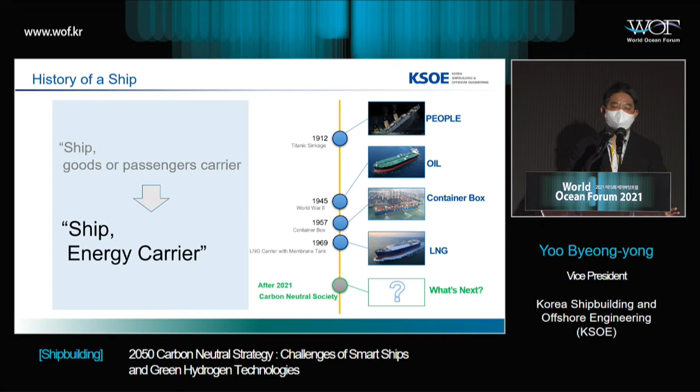That is because now ship is carrying containers, but from now on we will see a new era of ship as an energy carrier. But in the days of net zero, there is no way for ships to carry oils or coals. And what are we gonna do?

We talk quite extensively about carbon neutrality and hydrogen, but we have to see the two different scenarios here. The first is hydrogen as a cargo to be carried by a vessel, and another scenario is hydrogen as a fuel to run a vessel. So most of the presenters will elaborate on hydrogen as a fuel. That's category B in this case.

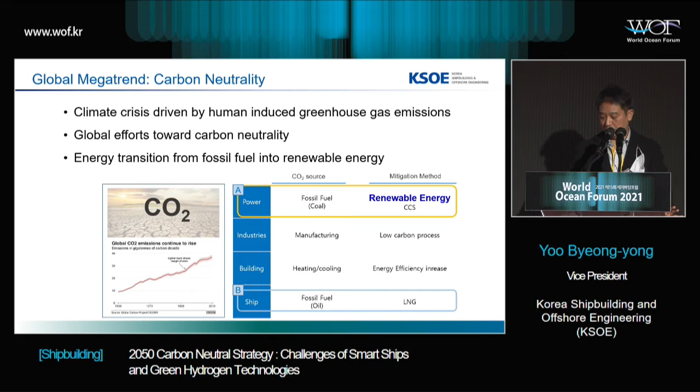So the environmental regulations and the operation of a ship itself drive the growth of hydrogen as a fuel, but the energy source, the energy mix, is a bigger driver for the development of hydrogen. Ships carry a large amount of cargoes, but now we are transitioning into renewable energy, so that brings about a serious concern. Now, why is hydrogen important?

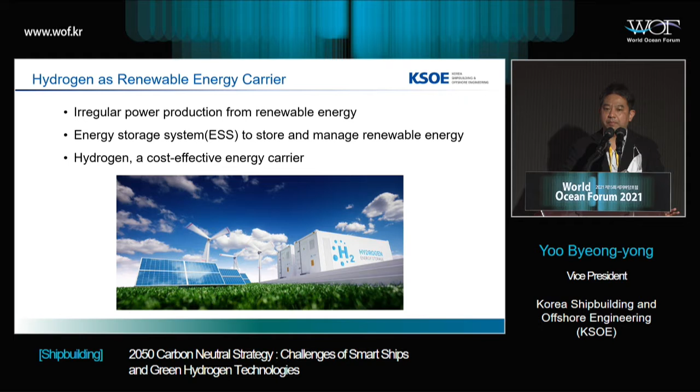Because new and renewable energy is not stable, so it accounts for only 30% of the energy mix. That is why the remaining 70% requires CCS, or energy storage, and energy efficiency is the highest with hydrogen. That is why, as we move toward a net zero society and hydrogen-based economy, the role of hydrogen will grow even further. So, in this case, we will see the increase in the cargo volume.

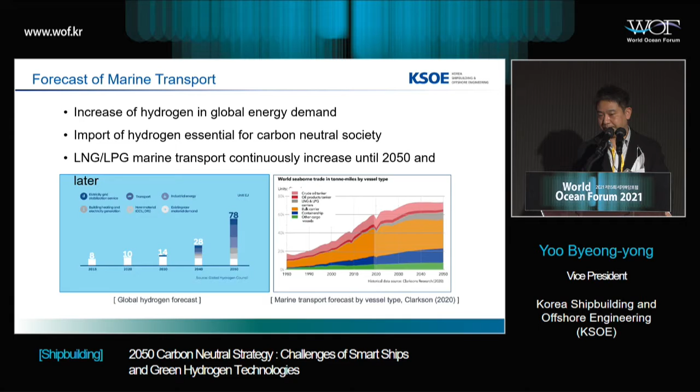So we talk about hydrogen and ammonia, but that doesn't mean that the cargo volume will go down, and in the maritime industry, this will present a new opportunity, a new type of vessels. There are three different ways to carry hydrogen. The first is liquefied hydrogen, and the second is LOHC, or liquid organic hydrogen carrier. And the third way to carry hydrogen is

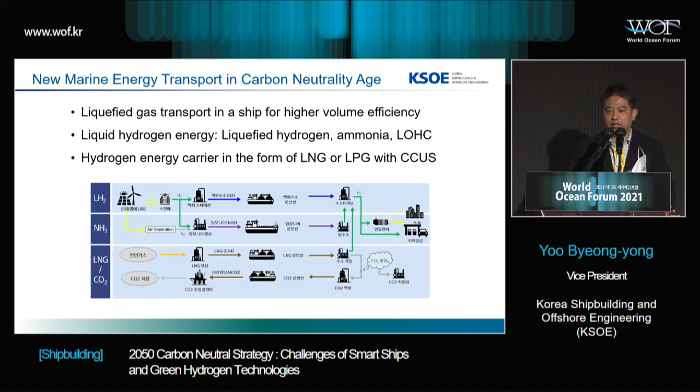to create and generate hydrogen at the point of consumption, but in this case, carbon dioxide will be generated. And to achieve net zero, we should be able to tackle this issue of carbon emission. That is why we have to turn to blue hydrogen. And in this case, we also have to consider how to eliminate carbon emissions.

So what are the carriers we will see for the transportation of new energy, and what is my group doing? This is the area I'd like to focus on in the second part of my presentation. As for ammonia, this is technologically accessible.

My company ranked first in the world in terms of LPG carriers. An LNG carrier puts LNG into different tanks. But as for an LPG carrier, it has multiple tanks, and each tank can carry a different type of gas and energy. And ammonia is registered as one of the standard cargoes, and we already have LPG carriers which carry ammonia, and we have three different shipbuilders which can build LPG carriers which can also carry ammonia.

But so far, ammonia has been just one of the cargoes for the LPG carrier, but if we are really to achieve net zero, with the higher level of cargo volume, then we should have an ammonia-dedicated vessel. That is why my company completed the design as well as the AIP, approval in principle, for a 91,000 cubic meter ammonia carrier.

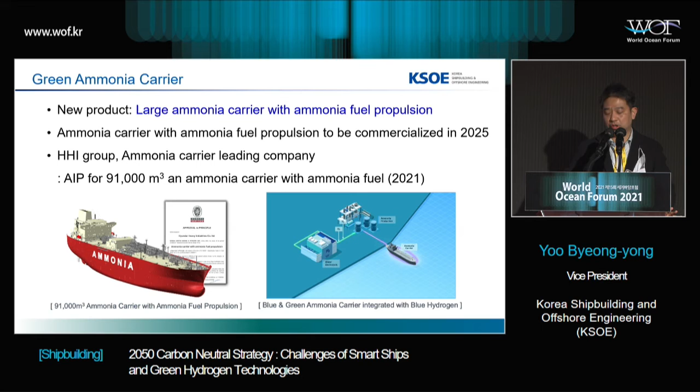So once we have an ammonia dedicated vessel, then we will have an ammonia fueled propulsion vessel. That is why we are working on the development of such a vessel. Next one is hydrogen itself.

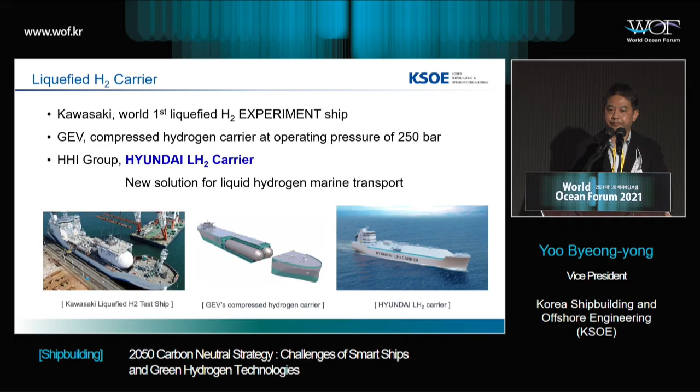Last year, we obtained the world first approval in principle for a commercial liquefied hydrogen carrier. And earlier this year, in collaboration with the Korean Register, we have been developing the international standard for the hydrogen fuel tank as well as the hydrogen handling system. So we have created the system starting from the ship, the standard, and then the system.

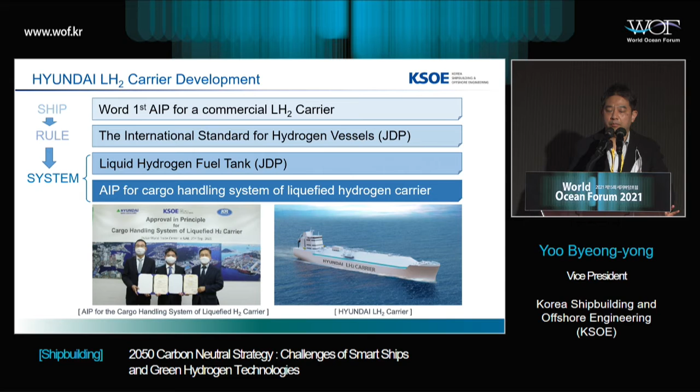In order to reduce the concerns in the market, we have carried out various efforts, and why we have been able to successfully soothe the concern is because we have reduced the boil-off rate. Liquefied hydrogen has such a high boil-off rate that it has at least 20 to 30% of hydrogen cargo loss during voyage. To prevent this, the market believes that you need a high-performing tank.

I think this concern is generated from our understanding of the LNG carrier. The LNG carrier has a re-liquefaction facility, and it also has a DF engine. But since most of the large carriers have membrane and liquefaction facilities, these facilities would cost you quite a lot. That is why the market believes that this is not commercially feasible.

But as for GEV, they use a 250 bar tank. In this case, there would be virtually no loss. We use a Type C pressure tank, and during the voyage, most of the BOG is kept in the tank, and the remaining BOG is used for the engine or fuel cell. We are developing a fuel cell in collaboration with the research center. So this is not just a concept, but something we have actually proved.

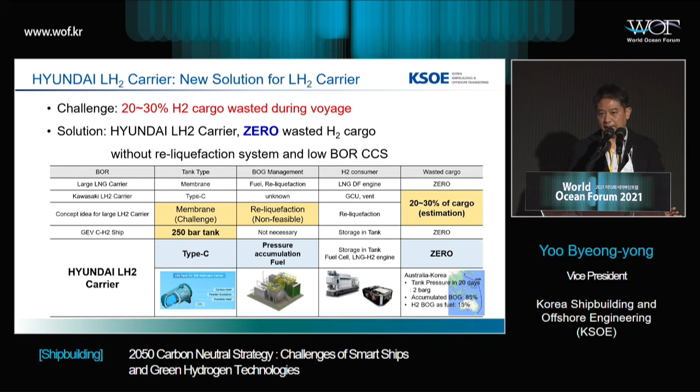So for the round trip between Australia and Korea, there has been no BOG loss. 85% of the BOG is accumulated in the tank, and we use about 15% of the BOG as fuel. So this much we have successfully reduced the carbon emission. So this will also contribute to low emission.

Another concern in the market is the storage, the requirement of infrastructure on land. An extremely low temperature tank for hydrogen might be required. Of course, if the size of the cargo grows exponentially, then we would need such a large infrastructure. But at this time, when we are trying to launch this technology, I think the hydrogen regasification system is more than enough. This is the system which has been available for LNG up to this point.

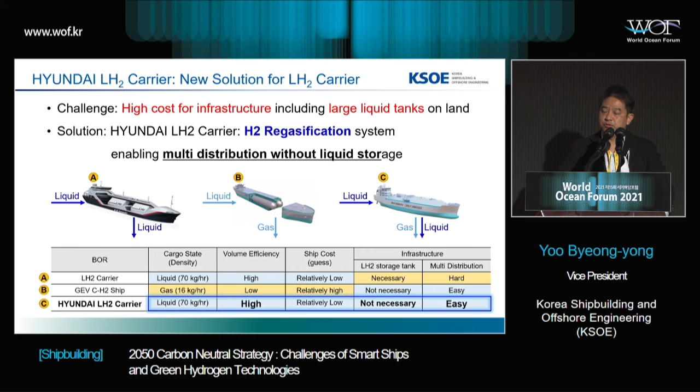As you can see in the center, GEV, since they carry pressurized gas, claim that they can provide this pressurized gas in multiple places. But as for our LH2 carrier, we carry them without liquid storage, but instead we have a hydrogen regasification system enabling distribution to multiple destinations.

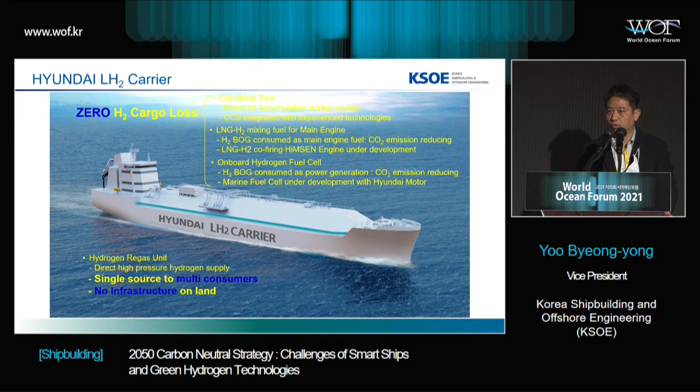So this is how the vessel would look based on all the features I just elaborated on. This is the concept vessel, and we are now seeing this step by step. We are in discussion and conversation with overseas carriers as well.

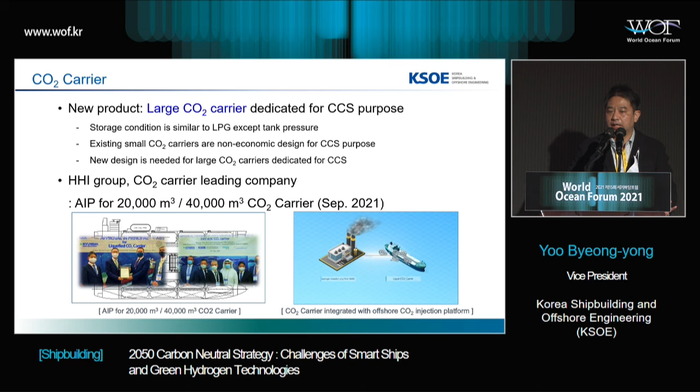Let me turn to the CO2 carrier. As I mentioned previously, CCS is critical for achieving blue hydrogen, and as for the storage of carbon dioxide, the carrier can carry it to various parts of the world across the ocean. Coca-Cola and some of the large companies are already using carbon dioxide carriers, but only for a small volume of cargo. Going forward, we would need a larger scale CO2 carrier. That is why we obtained AIP for 20,000 cubic meter and 40,000 cubic meter.

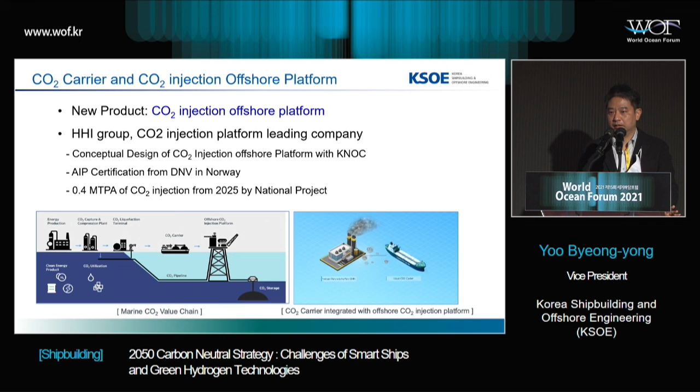Not just the ship itself, once the CO2 carrier becomes commercialized, we would need a carbon dioxide injection offshore platform to keep and store the carbon dioxide in the deep sea. So in line with this net zero effort, we will develop and create a CO2 injection offshore platform.

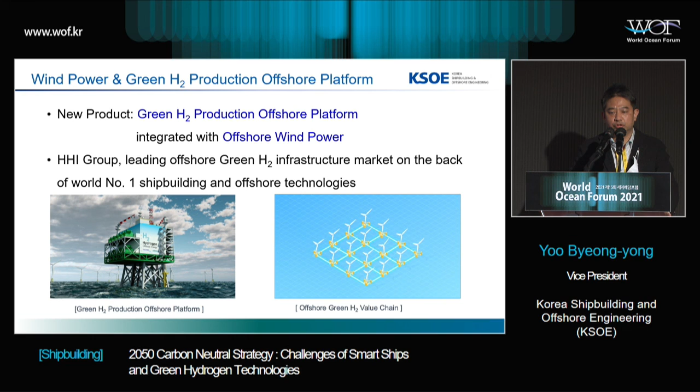Not just that, from the point of production, most renewable energies are generated in offshore facilities, and we will create an offshore wind farm. In other words, we are developing as a new product a green hydrogen production offshore platform integrated with offshore wind power. So I shared with you the new products we are formulating and developing with regard to the green ship.

Although my presentation is limited to the ocean, we will cover the entire value chain because the Hyundai Group has various points in the entire supply chain by 2030. So we will continue our efforts to develop hydrogen-related solutions.